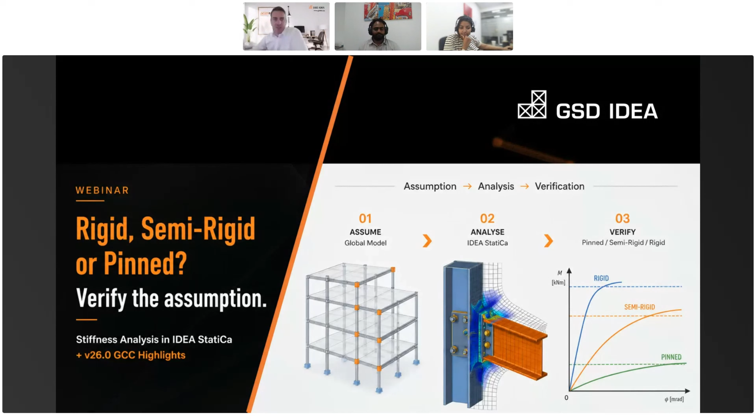We have a lovely Dubai morning, and we're excited to share with you not only the news in IDEA StatiCa version 26, but we will have also a very fascinating topic of stiffness analysis. You've definitely been there. You need to assess whether the connection is rigid, semi-rigid, or pinned, what to do, right? So we will be covering that.

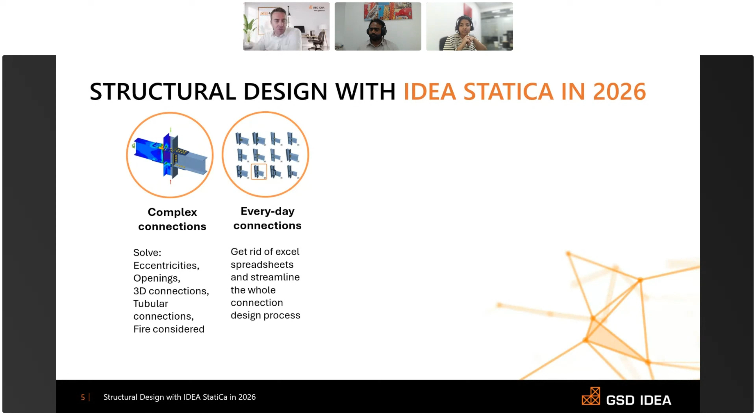75% of time, we tested it, you can save when switching from whatever solution you're having, Excel spreadsheet, some standard tools, to IDEA StatiCa, because the design itself is just 1/5 of the whole process. Don't forget that there is a process before and after, all the grouping, loading, sharing the data, compiling reports. The changes are always there. This is where you actually waste a lot of time, and IDEA StatiCa has a way to streamline it.

Anchoring, also a fascinating topic. IDEA StatiCa shines especially when you have a specific anchoring issue. You need to reinforce the concrete block. You need to know that the reinforcement is actually placed properly. This happens very often when the base plate is at the edge of the concrete block, or you need to make the concrete block of a special geometry. This is where IDEA StatiCa comes in.

Concrete discontinuities, openings, haunches, openings in beams, openings in walls, pier caps, pile caps. This is where IDEA StatiCa helps concrete engineers, and member stability, something that global FEA doesn't give you properly. Again, this is where IDEA StatiCa shines and makes the whole calculation much simpler, much easier. Good. That will be the intro. Rose, now to you. Please share with us what's new in version 26.

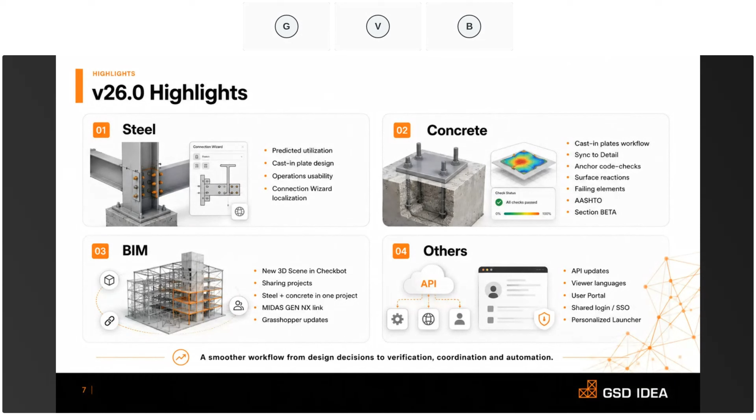The API now exposes the stiffness, length, and full connection library, which now removes an actual bottleneck for anybody running automated workflows. Some updates are big, like cast in plates and anchor checks. Some are smaller, minor, but I promise that they would remove the daily friction that we have with the modeling or with the analysis, etc. Now, with that note, let's start with our first update, which is the steel update.

The major first is the predicted utilization. So before 26.0, every parameter change, be it bolt size, plate thickness, edge distance, meant running a full CBFEM analysis again to see the actual effect on utilization. But from 26.0, for selected parametric templates, there's an ML model, which is a machine learned model that would give you a predicted utilization as soon as you change any parameter. You need not hit calculate again.

The model, which is a template that you choose, is trained on tens of thousands of pre-calculated CBFEM runs, so that the prediction that you get represents the actual analysis behavior, not just a rule of thumb. Also, the prediction is an estimate. The final verification must always be done by the engineer by running the standard EPS analysis. As of now, it is available for Euro and AISC code with EPS analysis.

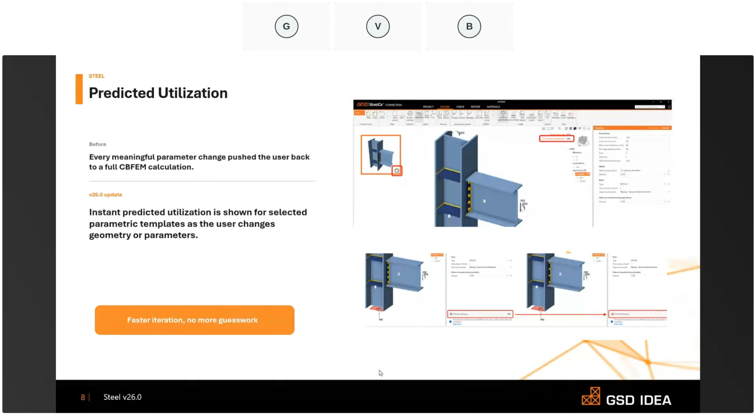Moving on to the next, this is the operations usability improvement. The user in me is personally very happy with this improvement. Doesn't sound major, but for those engineers who had to create additional weld operations just so they can only weld one part of the plate instead of the whole part, which was the default in earlier versions, that's now completely sorted. And yes, I'm more happy because this is also a development request from the users of GCC that we often placed. Now, coming to the details of the update, three modeling improvements here.

The first is the weld settings for the stiffeners. The web and the flange welds were tied together earlier, but now you can specify them separately. Second, the circular stiffening plates, which are set as doublers. Before, you couldn't weld them directly. The usual workaround was to import the entire plate as a DXF polygon. But now the weld is defined directly, and internally the circular plate is divided into segments, like a CHS, with the same segment count taken from the project setting.

And the third improvement is the total dimension of the concrete block. This again could be a minor improvement, but it would definitely create a major impact for your modeling work, because now in the 3D scene, as you model, you can also see the total dimension of the concrete.

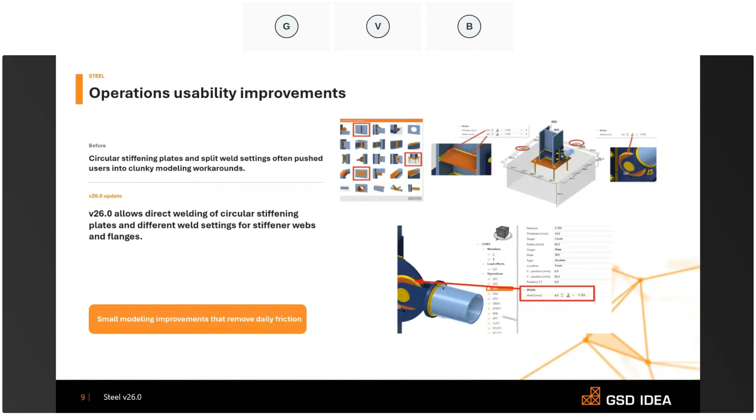Now let's move to the next, which is the localization. Mostly an update on the connection wizard, especially for American code users. Two changes for users designing in AISC code. The first is that a new template based on the Steel Construction Manual is now added to the connection wizard and shown on the top once you select the code as AISC. The second is the rounding behavior for imperial units. Before, values converted from metric templates would usually end up with very eccentric decimals. But now the wizard reads the rounding from the project setting and applies that to possibly every visible parameter.

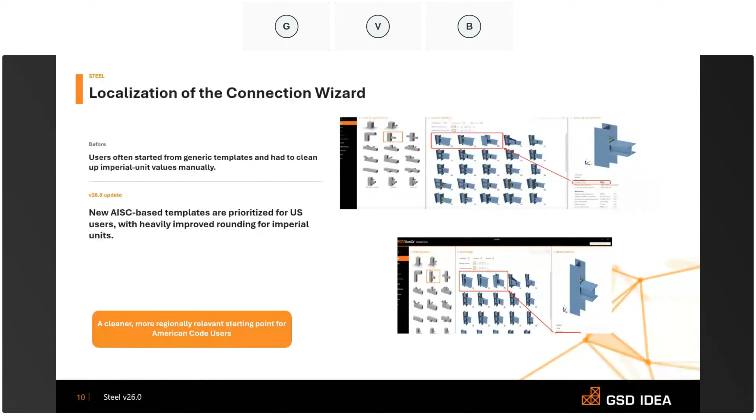Now to the next, again a steel update, a more important update for the steel to concrete anchorage workflow. Earlier, embedded plates or anchorage often required external checks, external tools, or workarounds outside the normal IDEA connection workflow. But in 26.0, engineers can model cast in plates. Best part is that they can be modeled with headed studs, reinforcement, or a combination of both directly in the connection application, completely aligned with the ACI 318-25 provisions for the cast-in connection checks.

Practically, this means that now the engineer can stay inside the connection application for more of the anchorage design instead of swapping or switching the tools or moving across the tools. And if he ever requires a deeper concrete block analysis, then he can export the same to the detail, which is still available.

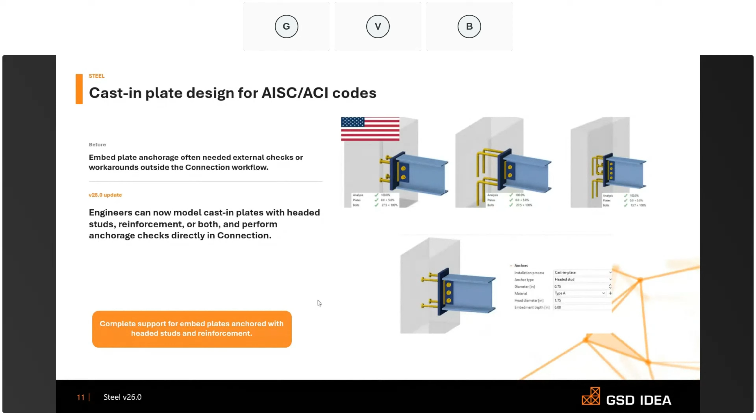Now, speaking about the 3D detail, that is the next topic, and the first major update that I'd like to tell is the new sync option. The old workflow was that you export a connection model to the detail. You started doing the reinforcement work, and all of a sudden, you have a change in the connection model in the connection application. For example, the column moved, plate resized, maybe loads revised, etc. But the detail project didn't follow the same changes that you have just made in the connection application. So what do you do? You'd rebuild it.

But in 26.0, there is an option or a tab called Update Existing, which you'll find within the connection application. Now, once you click on that, it would sync the detail project with the latest connection data that you've just input, without you starting over again from the 3D detail.

Now let's speak about what gets synced and what doesn't get synced. What gets synced is the concrete block as a whole, the cast-in plate, anchors, materials, obviously the loads. What doesn't get synced would be the project settings. That is, the project settings from the connection application and the detail would remain independent. But apart from that, all the connection details that you have changed, as mentioned, would definitely be synced.

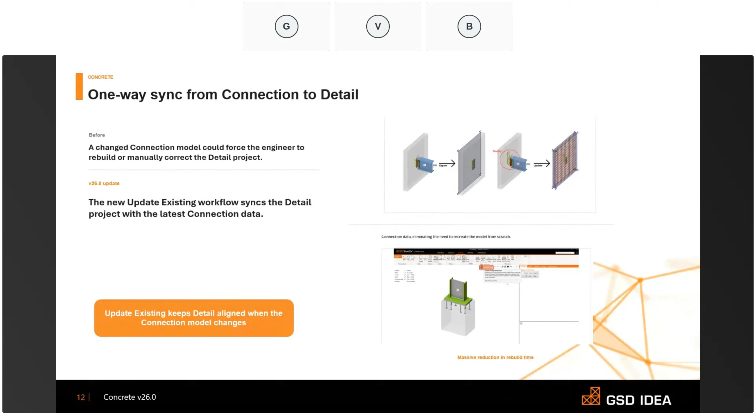Now that we have talked about the sync option, let's see what's being transferred and modeled in 3D detail. We already mentioned the cast-in plates, but now in 26.0, it is properly a full part of the 3D detail workflow. Earlier, the steel to concrete load transfer through the cast-in plates was not as direct, especially when we needed headed studs or welded reinforcement, etc. But in V26.0, cast-in plates are available as load transfer devices in 3D detail.

And now engineers can combine welded reinforcement and headed studs, if it is required in the project, on a single plate. The reinforcement can be straight, L-shaped, or U-shaped. The loads can also be applied directly to the plates or through a short steel stub, which gives a more realistic transfer of column forces into the plate and through the plate via the anchors to the concrete base.

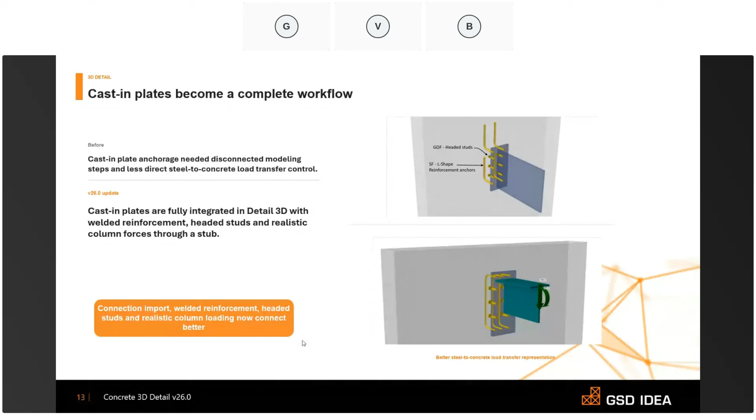Now the next question is what can we check? Okay, this actually covers a workflow gap. Earlier, detail could verify the concrete block in steel to concrete connections, but anchor steel checks like tension, shear, or bending were not completely a part of the 3D detail workflow. You again had to move to the connection application to do that.

But in V26.0, anchor steel checks are fully and directly integrated into the detail. So this is useful. The engineer doesn't have to treat the concrete block and the anchor steel as separate review items. It can be done in one whole application.

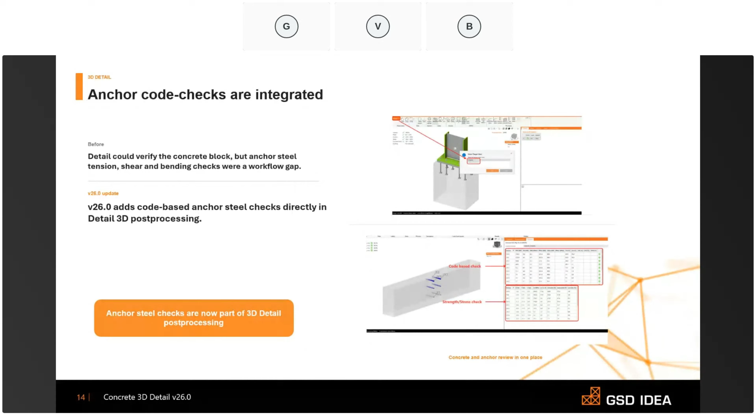Next one is again on the 3D detail module, more of a result reading improvement. Before 26.0, if we needed to understand how the support reactions were distributed over the concrete block, it was not visual. But now support reactions can be shown directly on the concrete block. Two types of views. First, the intensity, where we see the distribution over the supported face as a stress heat map. The second is the resultant, where we see the magnitude and also the direction. And the reactions can be viewed in either the global or the local coordinate system.

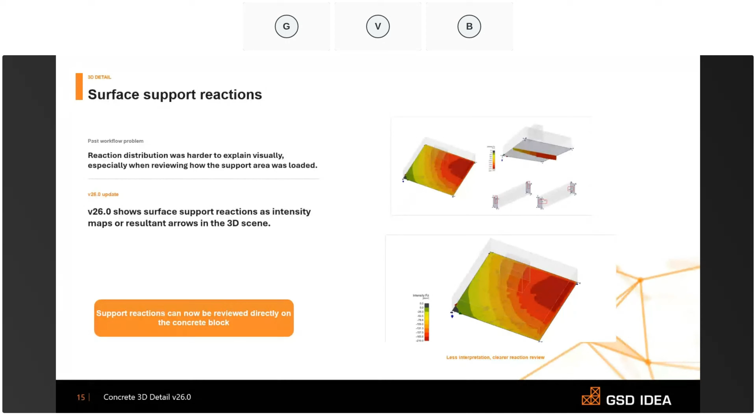Now the next one is my personal favorite from the 3D detail category, because I would say it's the most useful update for troubleshooting. Previously, if a detail analysis stopped before reaching 100% load, the engineer had to spend a lot of time figuring out the exact reason. Was it a capacity issue, a modeling issue, or a detailing problem? But now, when a stop criterion is reached, the software gives you the name, the reason, and the best part is that it also highlights the critical location in the 3D scene.

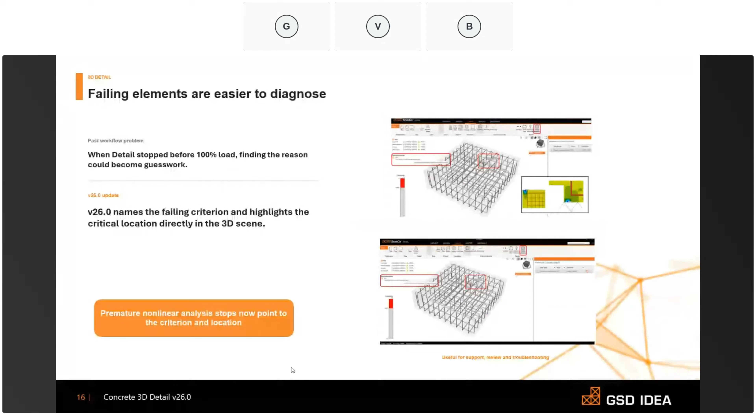So which means that you can start the investigation on the failure mode from the diagnosis that the application has just provided you. Next is a major update, mainly for infrastructure or bridge projects, I would say.

Now, V26.0 introduces this native AASHTO design code. Again, the most requested update from the GCC team. Not just that, but also dedicated 2D bridge templates, normal and high strength concrete materials. You can also add ASTM reinforcement and also a few pre-stressing materials. All of these have been added to the detail module.

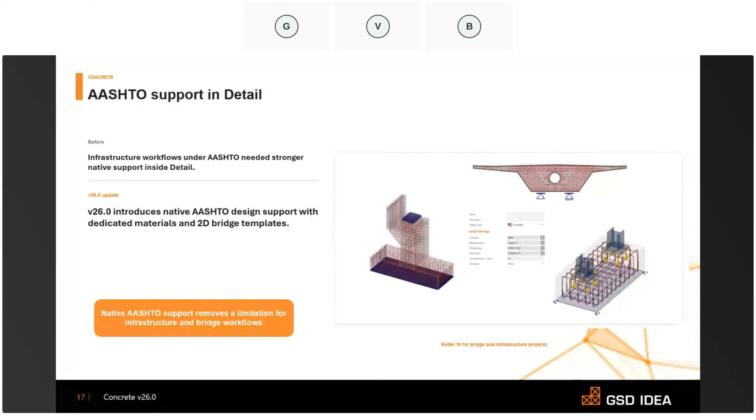So for engineers who are working on AASHTO infrastructure or the bridge projects, the workflow is now better aligned with the design environment that you specifically are looking for. Now to the next, okay, so it's not just the AASHTO that's been newly introduced in 26.0, but there's a whole new section. It's a completely new application or module, which is built around the new Eurocode generation, specifically the EN 1992-1-1:2023 one. And it's called the beta application.

The current scope is reinforced concrete section for ULS checks. The best or the biggest advantage is the transparency in the results, just like how you can see in the other modules or other applications. There is a very transparent result in the background. And it's not just the summary values, but also the detailed equations, the input values, the code references as well.

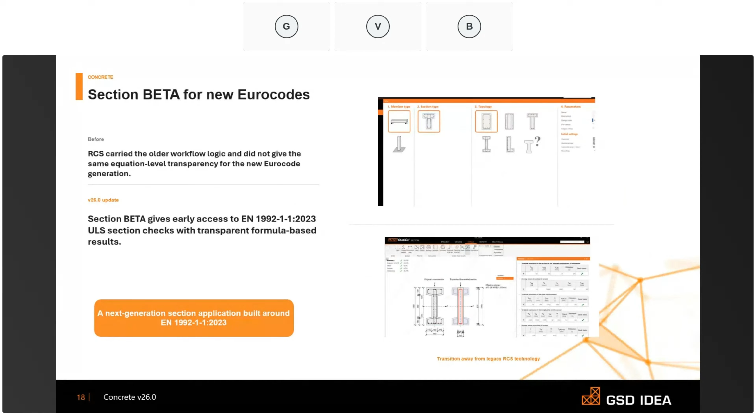Now, let's look at what's happening in the Checkbot, which is the platform to connect any third-party application to IDEA StatiCa. Checkbot now supports steel and concrete entities in a single project file under one design code. So the materials, cross sections, all of them are automatically imported or mapped, so that a project with both steel connections and also the concrete walls or pedestals can now be coordinated in just one place, which is 26.0 Checkbot.

Not just that, you also get to select multiple members by multi-select by drag option. You can hide, isolate, or reset. You can do all the visibility controls in the new Checkbot. A note to add here regarding the multi import of the materials would be that though Checkbot is now the coordination layer for mixed projects, the apps it opens into still have their own scope.

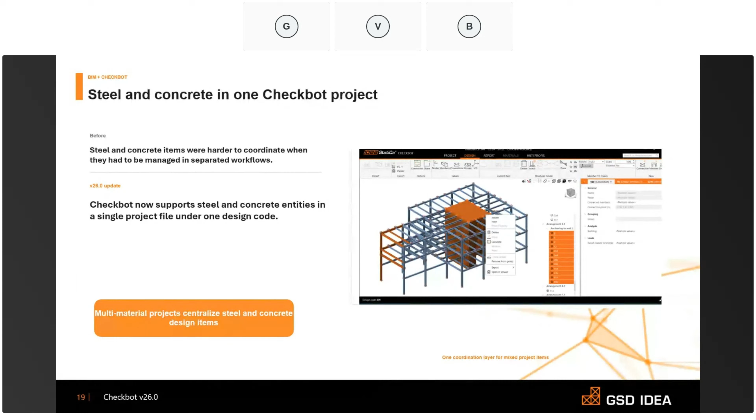And that brings me to the second Checkbot update, which is the sharing of the projects. Now, before this, sharing a Checkbot project could mean zipping the folder, sending large files, using any third-party applications or transfer tools to just send the files, or you can also use the individual viewer links. But all of this was a lot of task.

But with 26.0 Checkbot, the projects can now be directly shared through two ways. One is the email or via viewer URL, which makes collaboration much easier, especially when you want to send another engineer to review or to continue your work, or you need to pass the design intention to your modeling team or to your scrutinizers or even to your procurement team. The best part is that you can add more recipients, meaning that you can bulk share, and the receiver would get a notification in his email that a certain project has been shared to him.

And these projects are stored or shared via the cloud storage and are managed through the IDEA StatiCa viewer. If you just scroll down to My Projects in the top right menu, you will be able to find that one. From there, you can filter, search, copy, reshare the URLs, and also delete the shared files as well. The storage quota depends on the type of license that you hold. It would be different for the standard and for the enterprise, obviously bigger for the enterprise. And the best part again is that it is also available for the trial license users. So anybody in here who wants to explore IDEA StatiCa can very well explore this part of IDEA StatiCa as well.

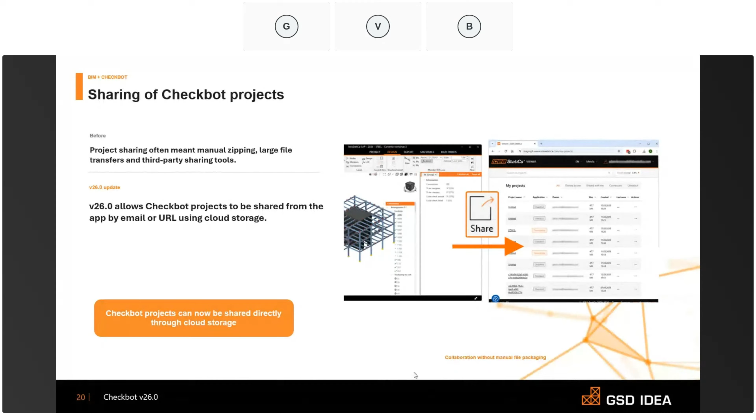The final update that I would like to speak about is also in a way related to our next biggest topic of today's webinar, which is the stiffness analysis. It's not entirely about the stiffness analysis, but it's just a small portion of an API update, mainly for engineers who automate parts of their work or build repeated workflows.

Now, two things are exposed in the connection API in 26.0. The first is a theoretical length, which is used for the stiffness analysis. That is the MY and MZ lengths. Now, that can be set or edited through the API. The second one is the full desktop connection library that's now reachable from the API, which includes all the sets, like the predefined, be it your company set or be it your locally saved private connection set.

So practically, this would remove a bottleneck. That is, before, you were generating connections from Grasshopper, from Python, or from a structural model, and you couldn't use the same templates your team used in the desktop app. But now those templates are directly accessible, and they're now scriptable.

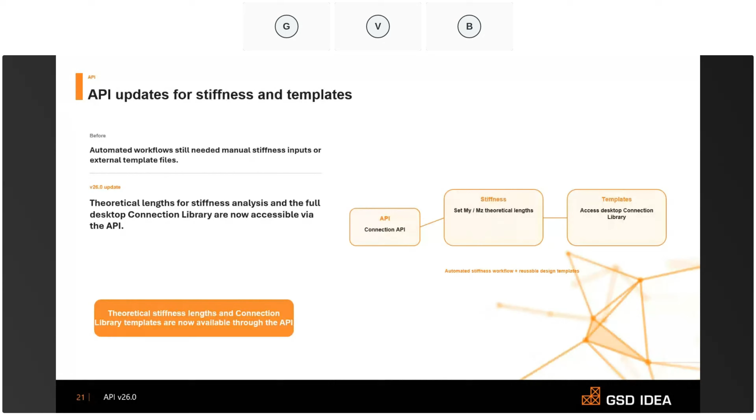Now, with that, I would like to pass the presenter to Jan just to walk us through the summary of the updates that I've just mentioned. Thank you, Rose. Wonderful highlights.

Well, it's difficult to do a summary when there are so many features that are interesting. I would probably have to go through it again and mention each and every one. I just highlighted here 3 or 4 that we believe will have the biggest traction. And honestly, many of them were requested from the GCC region originally.

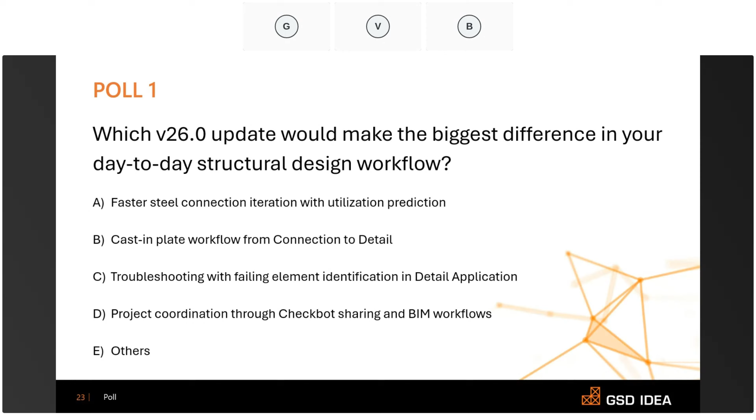Right, Venki? You're right, Jan. So I'll walk you through the stiffness analysis. Let me just share my screen. Very good. Okay. Still waiting for the slides. And now it's on. Got it.

Thank you, Jan, for confirming. Okay, so before we go to the stiffness analysis, most of us have assumed a connection is either pinned or rigid without verifying it. And often that works, but when it doesn't, the consequences show up as unexpected force distribution or internal stress redistribution, unexpected ones again, and also excessive deflections or connections that don't behave in line with what the global

model expects. So in this session, I'll walk you through how IDEA StatiCa can help you to verify your connection stiffness for any connection, and to check whether the assumptions made in your global analysis model have been retained in the real connection design, and what to do when it's not matching. So let me move to the main slide.

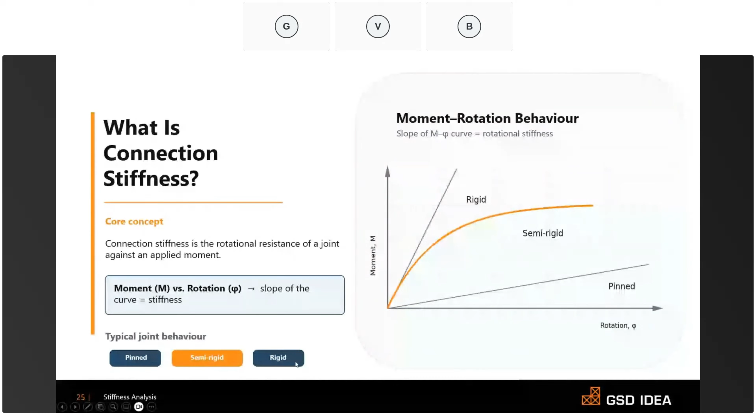And depending on whether the stiffness curve lies in between the pinned or rigid limits, falls above the rigid limit, or falls below the pinned limit, there are typical classifications of these connections, which are pinned, semi-rigid, and rigid, as we already know.

So moving on, let's see some of the problems associated with traditional calculations. Initially, we have to do the member analysis before we reach the connection design, because we need inputs: the forces, sections and everything. So the first thing that comes is the member analysis, which is the global analysis model. While designing this model, we have to assume a lot of things, like the end conditions of these structural members connecting with each other, like ideal pinned or ideal rigid condition.

I call it assumptions because we are not sure about the actual or real stiffness, because the connection itself is not done yet. So during this stage, we will be assuming the restraints or end conditions. Once the global analysis model is analyzed and checked with all these assumptions for strength and stability of the structure, we will push all the inputs of the global model to a connection designer.

He will go through all the inputs and design his own connection, providing plates, stiffening members, bolts, welds, and he will complete the connection design and check the stiffness of the real connection he has designed. If the real connection stiffness is in line with the global model assumptions, it's fine. If it is not, there are certain risks associated with it.

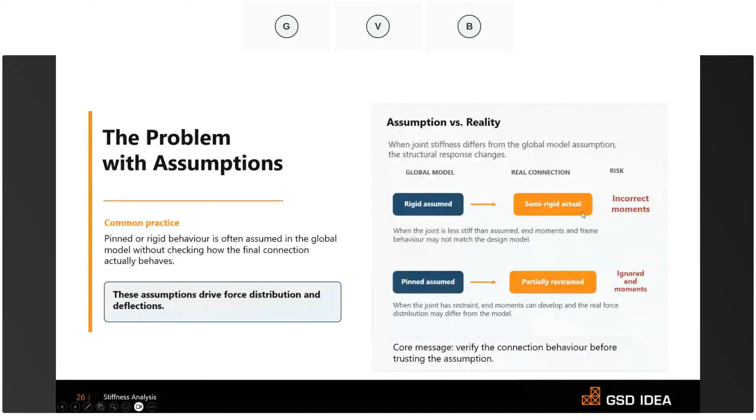For example, if you design a connection with 95% utilization and the forces increase by maybe 6 kilonewton meter or 10 kilonewton meter, there might be a chance that your connection falls into a fail zone. It might go above 100% utilization.

And for the SLS serviceability checks, the deflections, rotations and service behavior might change as well. The code suggests an error tolerance for stiffness between the global model assumptions and the connection model, like 5% for internal forces and 20% for deformations, which is okay within the limits. If it is crossing these limits, then we have a problem and we have to take care of it.

But it is not practical for us to check for each connection whether it falls within this percentage or not. Hence, it is always good practice to verify each connection for its respective stiffness, to ensure the connection we are designing aligns with the global model assumptions. If it's not, we will see what to do next in the next slides.

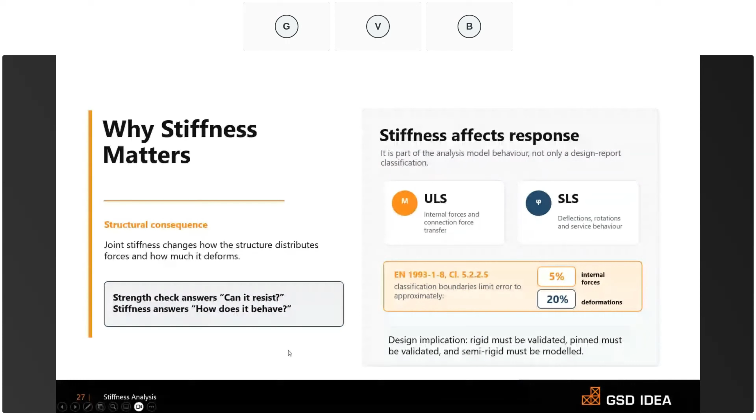So to eliminate all these problems, you can perform the entire stiffness analysis in IDEA StatiCa with ease. Stiffness analysis is a separate section in the connection module itself, and you can perform it in various codes like Eurocode, AISC, and so on. The outputs you get from the stiffness analysis in IDEA StatiCa are namely these three. The first one is the moment rotation curve, which we already discussed at the start of the session.

And the next one is the stiffness value tables, like initial stiffness, secant stiffness, and rotational capacity of connection, and so on. And finally, the joint classification, like pin, semi-rigid, or rigid. If you didn't understand any part of this value table description or the curve itself, do not worry. We'll be talking about each of these in the next slides.

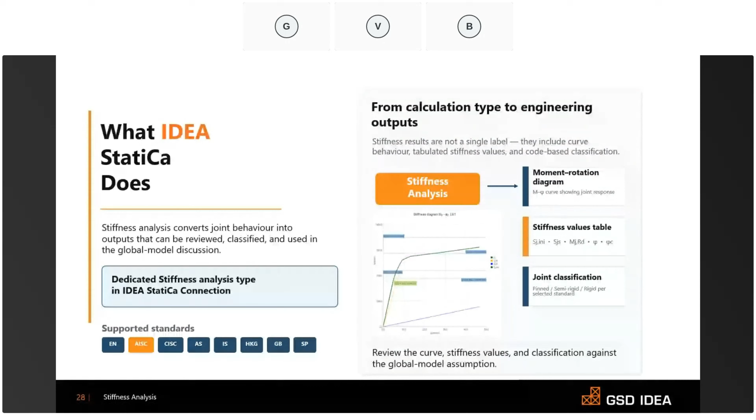So just be patient. And let's see how stiffness is actually analyzed in IDEA StatiCa, what is happening behind the closed doors. You don't have to do any setting option or do anything. This is just what happens behind the closed doors, how the solver performs the stiffness analysis to give you the output. But it's better to know how IDEA StatiCa analyzes. That's why we have this slide.

So IDEA StatiCa analyzes the stiffness with the help of two internal models. First one is the full connection model. It will consider the entire members like the column, the beam, and all the connection elements like end plate, bolts, welds, and so on, and perform the stiffness analysis for this. And we will get a rotation of theta total.

This analysis will be done by multiplying the applied loads with a multiplier until the resistance of this joint is reached. The resistance is reached when the utilization of bolts is reached, or utilization of welds is reached, or the strain in any of these plates reaches 5%.

The next one, it will perform the member-only stiffness, for which it will not consider any connection elements, only the members, and the rotation is calculated and named theta1. And finally, to get the pure connection stiffness, we subtract theta total minus theta1 to get a theta2 rotation. That is the rotation of this pure connection. This is how in IDEA StatiCa the stiffness is calculated.

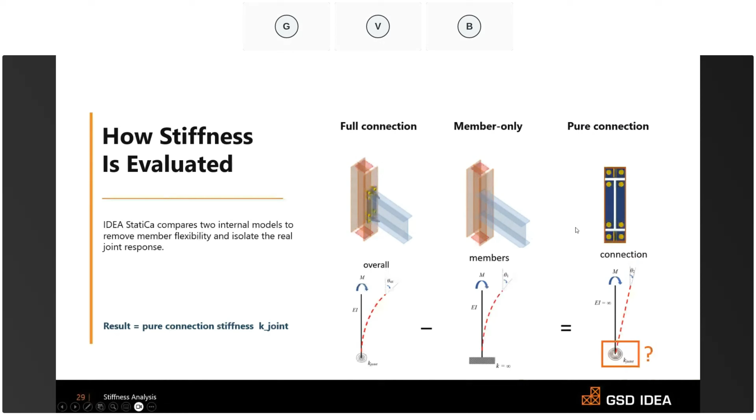And now let's see what are the inputs which we should feed into IDEA StatiCa to have proper results. And I want to highlight that these settings are not optional, they are mandatory to ensure that what is there in the global model is exactly represented here, so that you will have realistic results rather than approximate results. You will understand why in the later slides as well.

So the first input is the theoretical member length. This option will be active only if you change the analysis type from stress strain to stiffness. Once you change the analysis type to stiffness, you will have two options: to assign theoretical length of the member in Y plane and Z plane. This theoretical member length is nothing but the node length of this member. So it is pretty straightforward. At these two fields, don't leave it default. Check for the node-to-node length of this member and assign the lengths accordingly.

And the second one is the minimum loading. As explained in my previous slide, IDEA StatiCa stiffness analysis will increment your loads until the resistance is reached. So you should assign a decent magnitude of forces or moments in order for the solver to perform the stiffness analysis properly. IDEA StatiCa recommends a minimum of 1 kilonewton of translational force or 1 kilonewton meter rotational force in MY, MZ, or MX.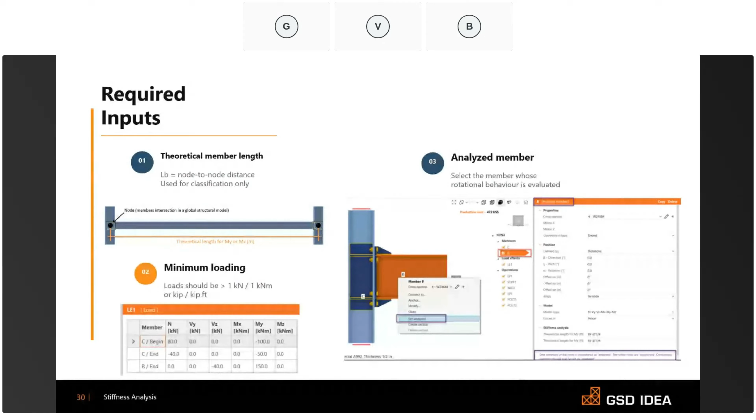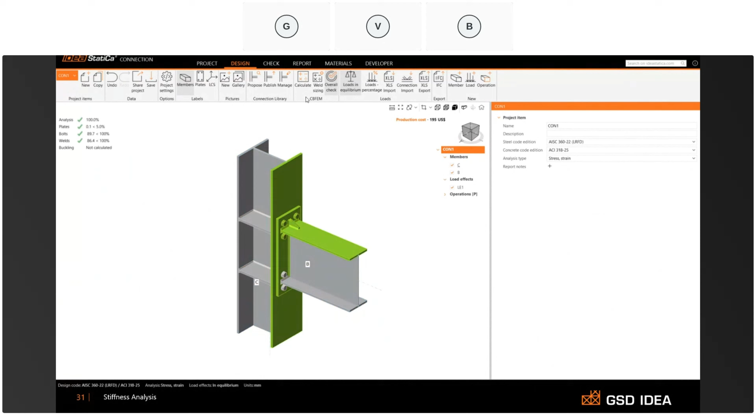So a small demonstration of how it works. Here we have a moment connection where a beam is framing into the column, with the end plate, bolts, and rib plates. The first step was to analyze for stress strain, because if it is not passing in stress strain, there's no point in going for stiffness. So first of all, we have to make sure that stress strain is okay. Then you can make a copy of this. Once you make a copy, you can go to the analysis type and change it from stress strain to stiffness.

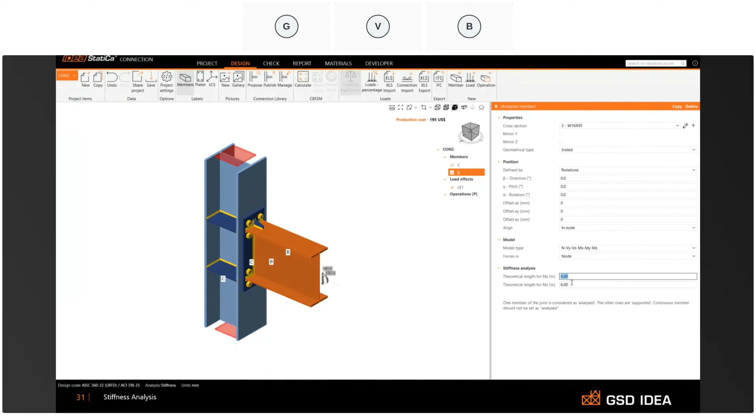And the important points to check the inputs: whether the member is set as analyzed. Yes, it is an analyzed member. Next one is the theoretical length in both planes, in the Y plane and Z plane. We have to get the nodal distance, nodal length, and we have to enter those values here accordingly. And these are very important.

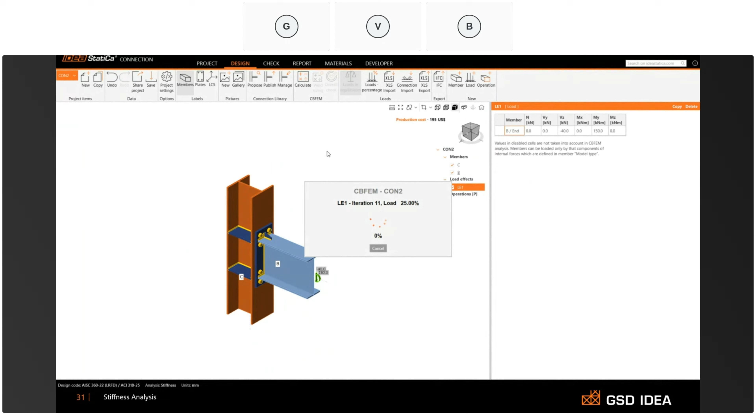And finally, the load cases. We have to ensure that a minimum of 1 kilonewton or 1 kilonewton-meter is inputted as loads. And finally, we can calculate. And since, as discussed, it performs 2 different internal models, stiffness analysis will take a little more time than EPS analysis because it has to do more.

Now it's done. To check the behavior of this connection, we can go to the check tab. And on the right side, you can see the 100% loads applied. In the rotational stiffness tab, you can see the tables of results along with the moment rotation graph.

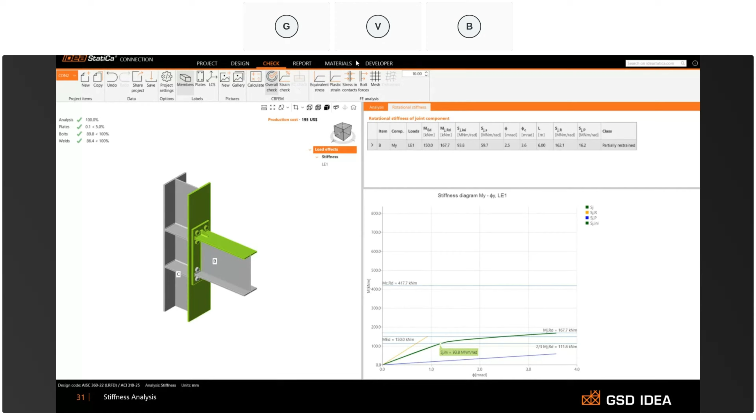So here there is a lot of information, a lot of abbreviations, and a lot of values. And in the graph, there are a lot of lines, green line, yellow line, blue line, and so on. So it might be a bit overwhelming, but it is very simple. Let me make you understand that very clearly. To understand that, let's move to the next slide, in which I prepared the details accordingly.

And the component of it: we have 3 rotational components, which are MX, MY, and MZ. If we are assigning loads in any of these components, only that component's stiffness values will be evaluated. If you are not inputting MZ or MX, then that will not be evaluated. So this will be the component in which the member is loaded. It is loaded in MY to check the rotation.

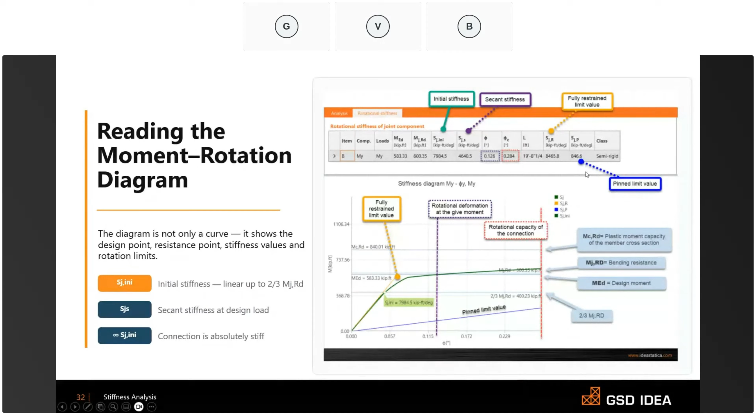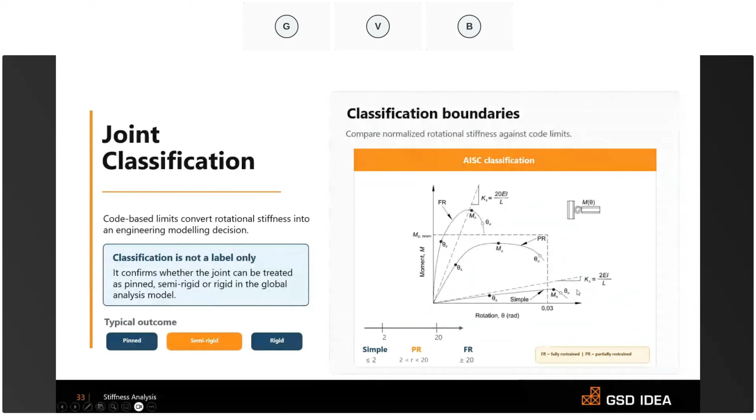So EI is constant and L is theoretical length, and hence if L is inaccurate, you will get the limits of pin limit as well as rigid limit not exactly as required for your respective case. That's why theoretical length is always important to get these limits accurately.

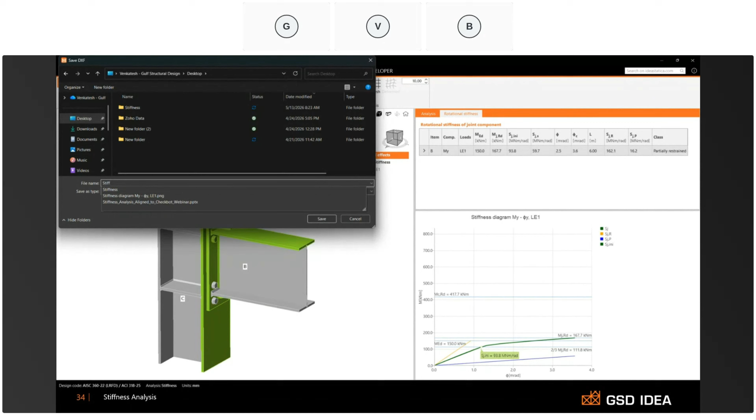And if you have to transfer the initial stiffness, it can be transferred because that is a uniform stiffness. But if you want to transfer the secant stiffness, that is non-uniform stiffness. So to transfer that, you can do these. The graph can be exported as an image, and you can save it. You can also export it as a DXF, which you can use as a reference, or you can also export it as an Excel file. And this is how a picture looks once you export it as a picture format. And you can also export it as an Excel file.

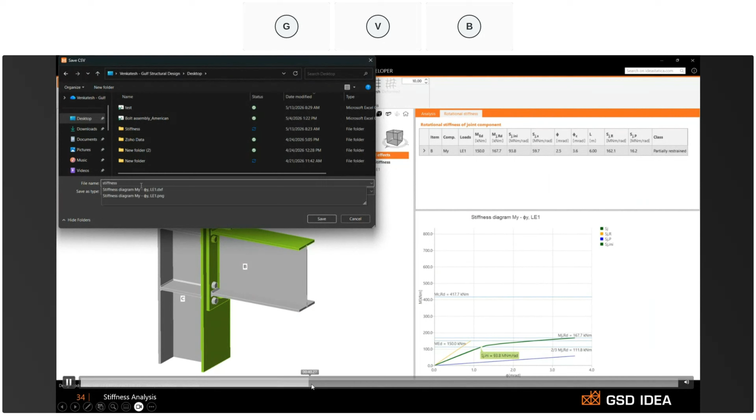And once you open Excel, all the stiffness values will be plotted against X and Y, and it will look like this. And you can form the graph even in Excel to transfer these values into your global model if the global model accepts. For example, some accept only a single value for a spring constant, and other models will accept these non-uniform springs as well. So if you're working with software applications which accept these nonlinear springs, then you can transfer this information directly into your global analysis model.

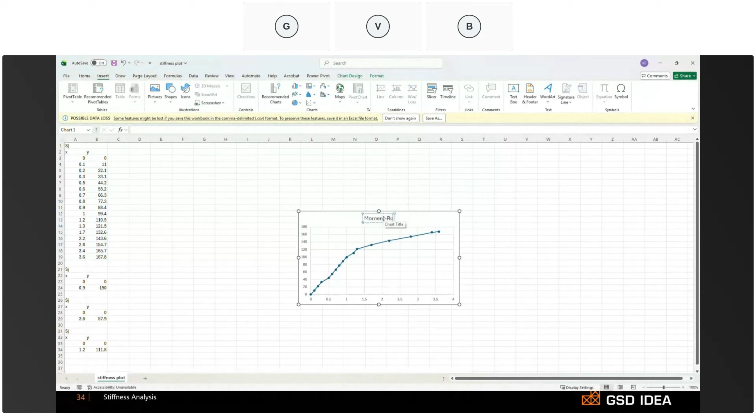And we have a lot of outputs from stiffness analysis to make you understand it better. We prepared a flowchart for you so that everything is very clear. So once you have the results, you will study the classification behavior first, whether it's rigid or pinned or semi-rigid. If it is rigid, then you will verify in the global analysis model what assumption was made. If it is also rigid, then you can leave it there. If it is pinned, then you will check in the global model again. If it is pinned again, then you will leave it there.

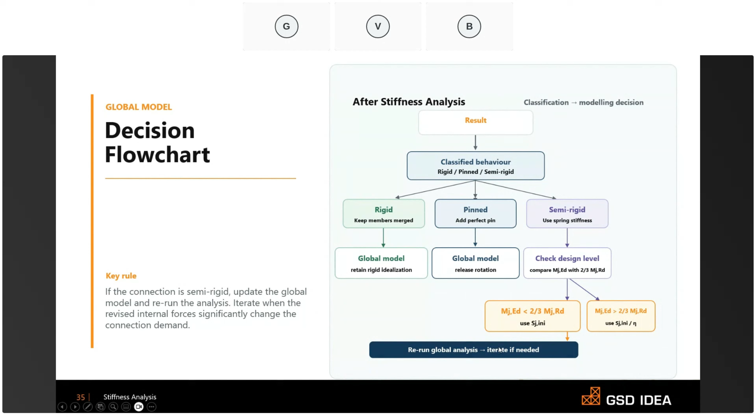If it is semi-rigid and it is not exactly matching your global model, you can compare the applied moment with 2/3 of the connection capacity resistance, which we have seen as the 2/3 line. So if MjEd is less than 2/3 of the overall connection capacity, then you can use initial stiffness. And if it is greater, then you have to use secant stiffness. So this is how you choose between initial stiffness and secant stiffness. Once this is done, you can transfer the stiffness values to the global model and iterate the global model to have accurate behavior as expected.

And we have a few slides about common queries we are getting to our support. To understand it better, we made this slide, which is to understand the load path. It is important to study the load path as well in the stiffness, because as you can see, for example, there is a beam and a column connected with the help of a haunch, and hence when moment is applied, this is deforming at the bottom and also at the top because of prying. So when moment is applied, you will have tension at the top and compression at the haunch location. So the haunch is active in the load transfer path.

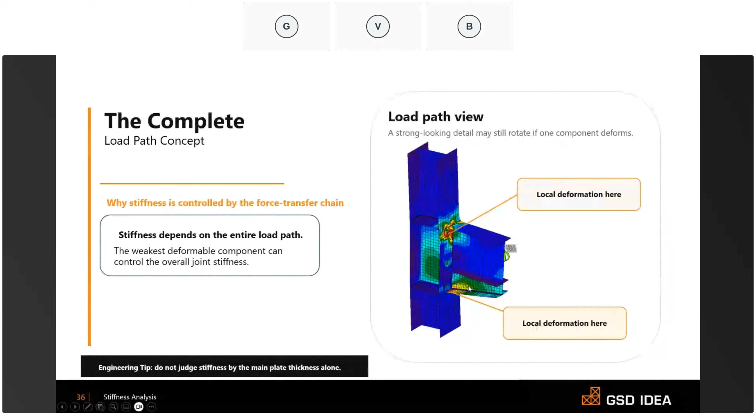If it deforms, then the overall connection stiffness will get reduced. For example, not only this haunch, if you have ribs, then not exactly the plate deforms. If any haunch or any connecting plate which is active in the load transfer path is deforming, then your overall connection stiffness will reduce. For example, I have a small demonstration explaining that. This is a haunch connection, and we analyze it.

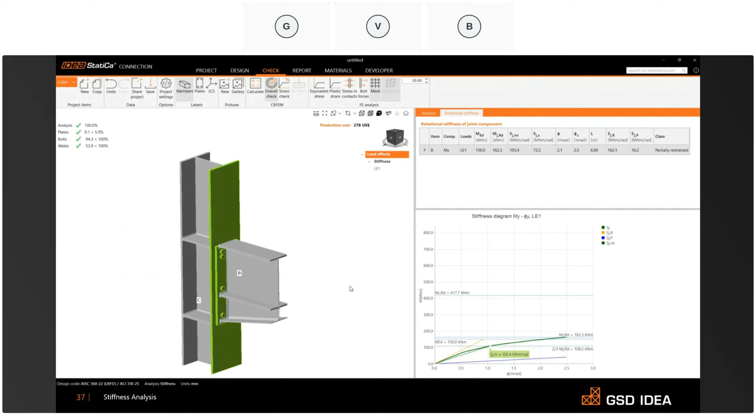And after analysis, we see that the classification is partially restrained, not fully restrained, but this is a moment connection, and moreover, it's a haunch connection. I want it to be a rigid connection.

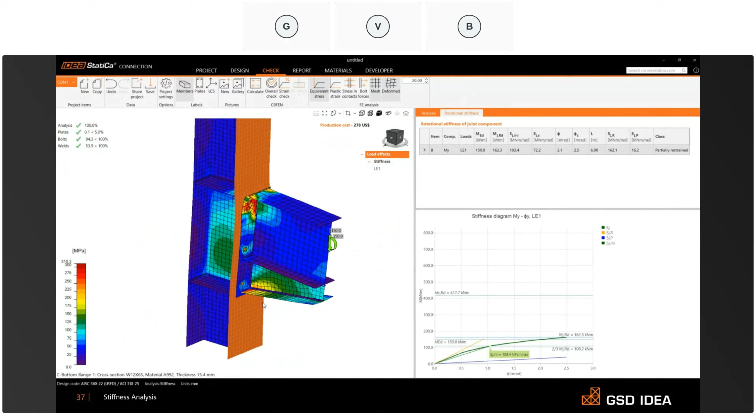So I check the deformation and equivalent stresses in IDEA StatiCa, because in IDEA StatiCa you can see all the visual heat maps, and you can see certain deformations and stresses concentrated at the haunch bottom. So I will go back to the model and slightly increase the thickness of the haunch. I will not make any changes to the plate or bolt arrangement or weld arrangement.

Now in the results, we can see that it is fully restrained. So we shouldn't get confused into assuming that moment connections are rigid. We have to verify it once, and we have to check all the components in the load transfer path and ensure that nothing is deforming or lacking stiffness. We have to ensure that everything is stiff enough to transfer the forces if that particular component is active for the load transfer.

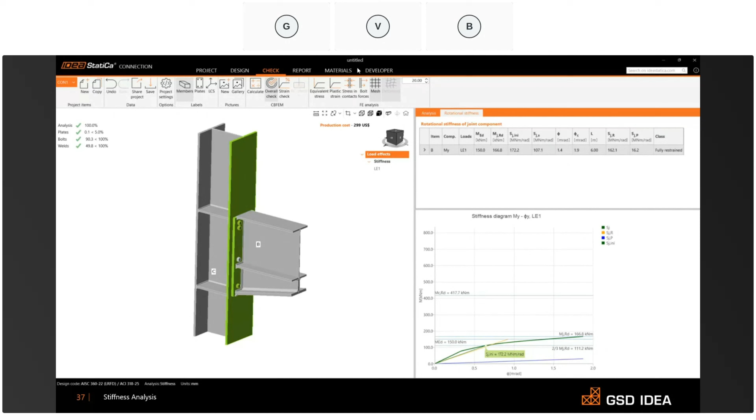And the second query which we get is, it is safe in stress strain, but it is not safe in stiffness analysis. This is a common query as well. As you see, the analysis engines or analysis models behind stress strain analysis and stiffness analysis are quite different, and hence a connection passing in stress strain analysis doesn't automatically mean that it is rigid or pinned and so on.

So some of the key points to highlight between the analyses: the purpose of stress strain is to check strength, and stiffness checks rotational behavior. In stress strain you have only one bearing member which receives all the forces. In stiffness analysis, all members are assumed to be supports except the analyzed member. For loading, in stress strain we can load all members; here only the analyzed member can be loaded. And the capacity difference: max load before failure, versus points where stiffness drops. And for the internal model itself, like condensed superelements, it is considered as 4 times the width, and here it is 2 times the width.

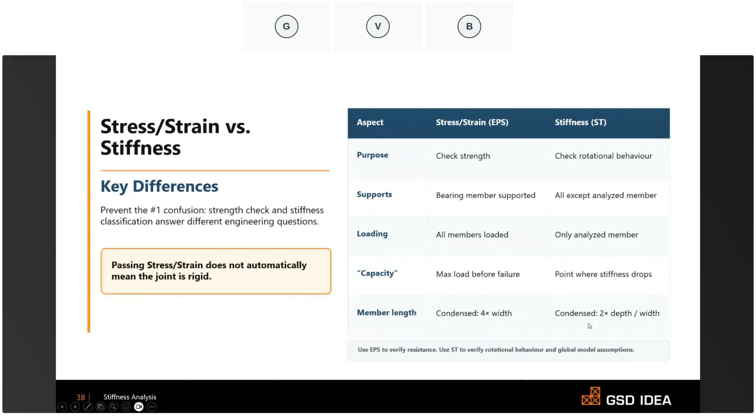So do remember that if a connection is safe in strength, that doesn't automatically make the stiffness rigid or whatever we are expecting. So we have to make sure to check all this and do the stiffness analysis accordingly. And in most cases, if you're analyzing stiffness, the weakest deformable component in that load path contributes to the reduction in stiffness of the connection.

So make sure that you check all the components which are active for the load transfer, and you read the results, which is the moment rotation curve, and validate the global model to make sure that the assumptions match the realistic connections. If not, transfer the stiffness as a spring into your global model and recheck it again. And it is very important to read the moment rotation diagram as well to get the initial stiffness or secant stiffness and transfer that information accordingly.

And also, moment connections also need verification. I just did a haunch connection, which is a moment connection, but the classification turns out to be semi-rigid, not a rigid connection. So I have to do some alterations to make it a rigid connection. So if you have a moment connection, that doesn't automatically make it a rigid connection.

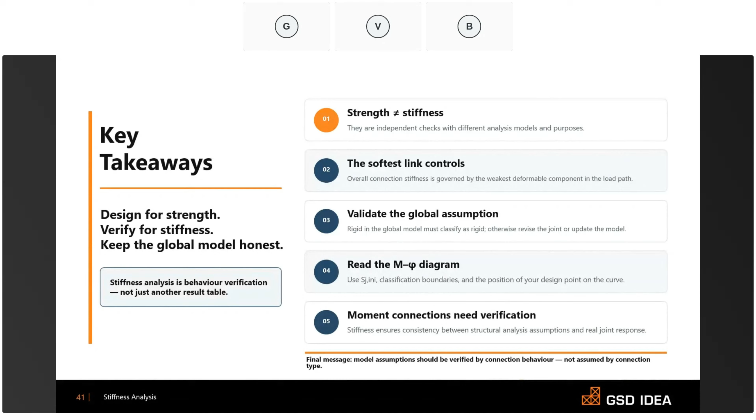And the recommended workflow: first, design your connection, run the stress strain analysis, verify every connection component. This is because if stress strain is not okay, then doing the stiffness doesn't make sense. We'd have to go back to stress strain, iterate again, and bring those components to stiffness again. So better first make the stress strain analysis work, then copy the item to stiffness, set analyzed, calculate, read the classification, and compare the results.

If it is matching, fine. If it mismatches, either revise the connection arrangement to make it stiffer, or modify the spring stiffness in the global analysis model and recheck again. And finally, document it.

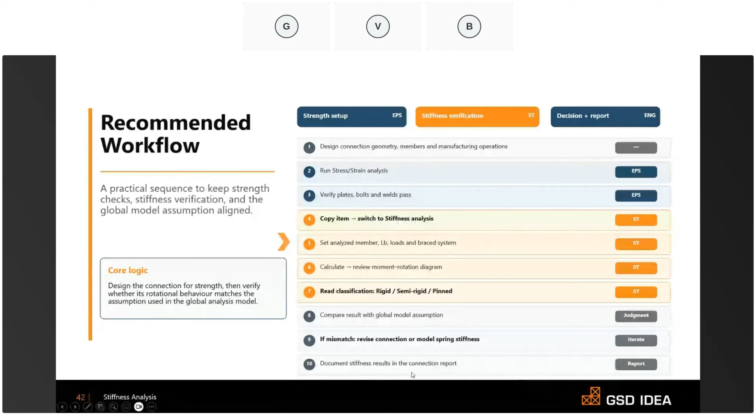Thank you, Venki. So that was a comprehensive overview of stiffness analysis in IDEA StatiCa.

We will almost wrap up today's session. Before we do that, as promised, for the first time ever, GSD IDEA team developed 2 applications that improve the usability and workflows with IDEA StatiCa. So let's take a look what is there for you.

First application: if you struggle with generating bill of material reports or ERP data for your planning or procurement team, BOM Extractor is very simple. Click and open the app where you can upload IDEA StatiCa files, click on extract, and the application will give you an Excel spreadsheet with 4 tabs, each tab for a different type of material: plates, bolts, welds, anchors, all including the important information that your procurement team wants.

Why was this application requested so much by many engineers here in the GCC? Well, not only do you eliminate the potential errors when creating the BOM reports manually, copy pasting from IDEA StatiCa and other resources, obviously also from your global analysis, you have to spend the manual time. So many engineers spend 2 hours per average 10, 15 connection small scale project. So the bigger the project, the bigger the time saving.